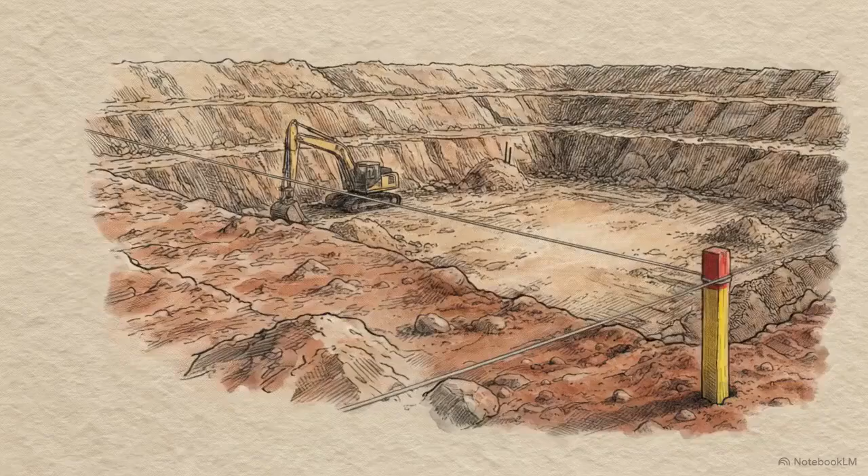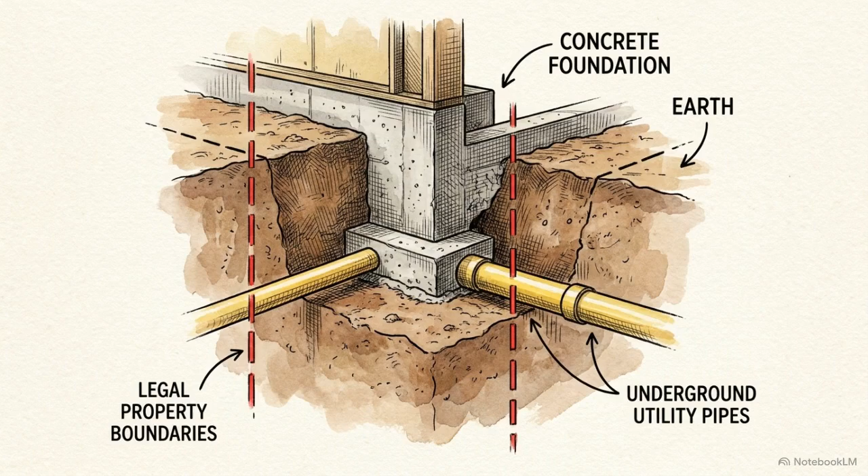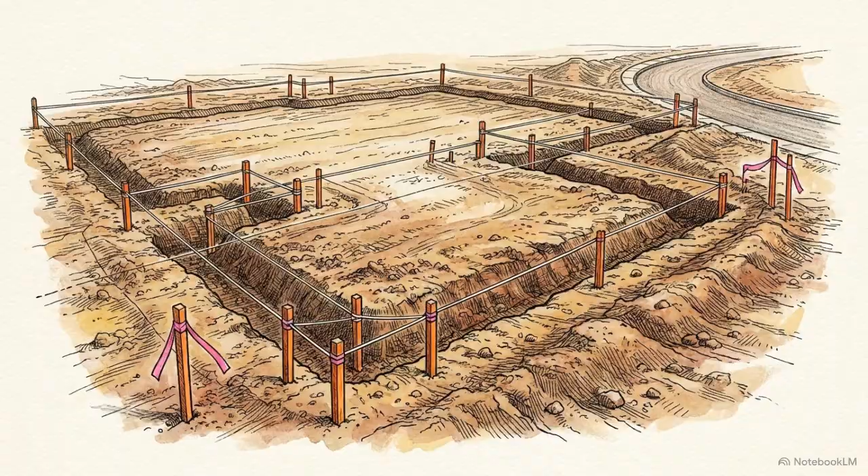Concrete is expensive, but pouring it in the wrong place costs even more. If a site measurement is off by even a few millimeters, a project risks crossing legal property lines or striking underground servitudes. Before any physical building occurs, a surveyor must translate the architectural design into coordinates and elevations. They establish the physical limits that dictate where every foundation and road will actually sit.

The land surveying branch is tied directly to property rights. These professionals are responsible for framing cadastral diagrams, the official state records of land, and establishing legal boundaries and subdivisions. Engineering surveying focuses on the mechanics of construction. Their scope includes setting out structural positions, measuring earthwork volumes, and ensuring the precise alignment of infrastructure.

Depending on your branch, you are required to log between 240 and 300 working days of approved training, split across specific categories of field and office work. This training isn't independent. Every hour must be completed under the direct supervision of a registered professional mentor.

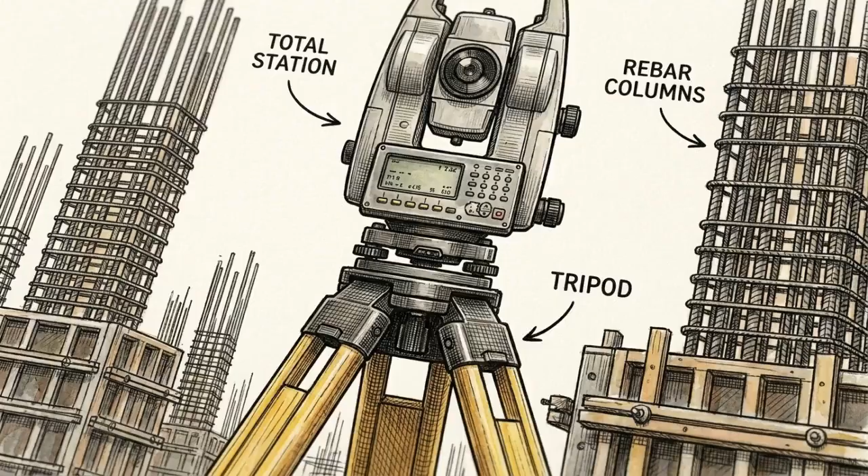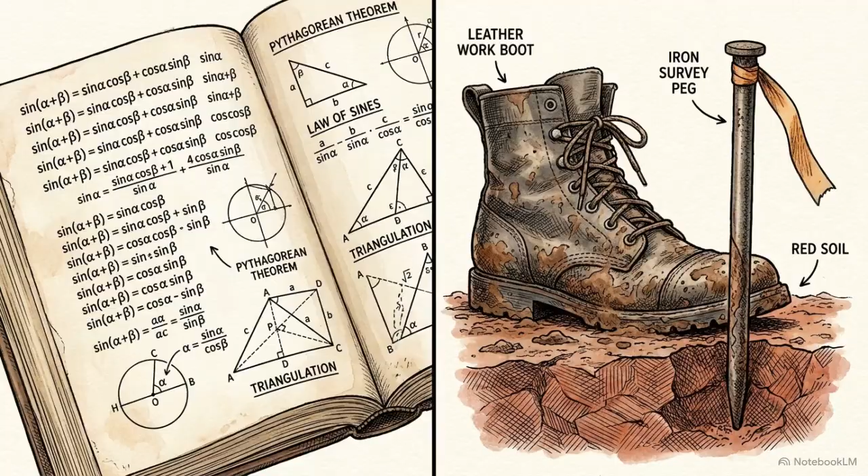For land surveyors, you'll need to prove competence in sectional title surveys, township establishment, and the physical execution of land subdivisions. Candidate engineering surveyors focus on different benchmarks. They must demonstrate they can manage high-order control networks and perform complex volume determinations on active construction sites. The training period exists to ensure an applicant can take academic theory and apply it to physical site measurements that are legally binding.

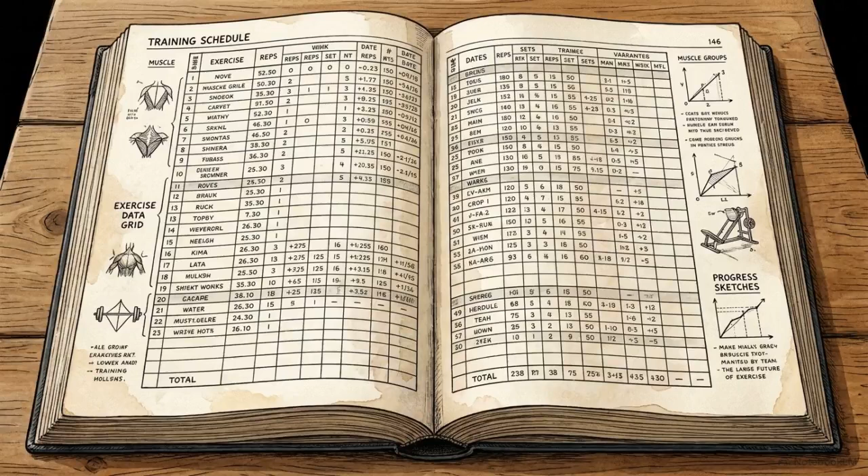Once the training days are complete, you submit your application pack. This includes certified identity documents, university degree certificates, and proof of payment. The most important document in this pack is the training schedule. As you can see in this logbook, you must provide a detailed record of your daily tasks, including the instruments used and the specific calculations you performed. Your mentor must sign off on these logs to verify that you carried the actual responsibilities of the survey, rather than just acting as an assistant.

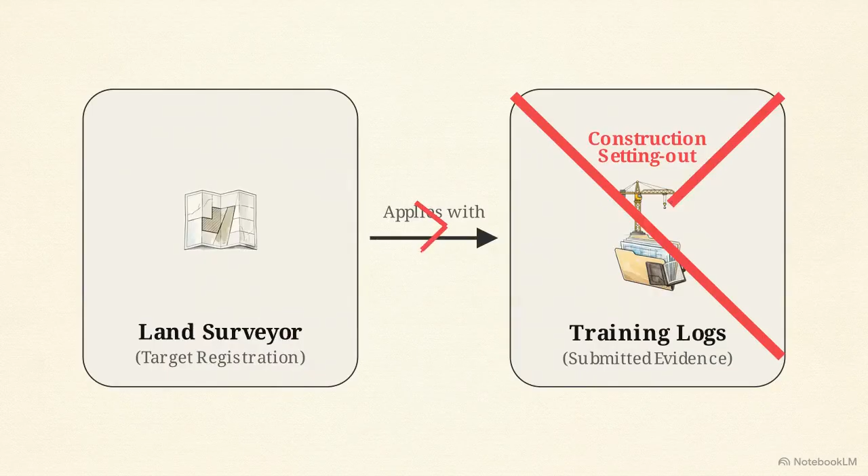A common mistake is submitting experience that doesn't match your chosen branch. If you apply as a land surveyor, but submit logs filled with construction setting out, your application will likely be rejected. Another pitfall is submitting logs that only describe equipment operation. The SAGC is looking for an analytical professional who understands applied error theory and can interpret engineering drawings independently. This documentary evidence allows the council to verify that an applicant is capable of assuming professional liability for their work.

If your documentation is approved, you enter the assessment phase. This includes a multi-day law examination covering the Geomatics Profession Act and provincial legislation relevant to land development. Professional land surveyors must also pass a practical reconstruction test. In this scenario, you are tasked by the Surveyor General to mathematically re-establish a missing property beacon using only known control points in the surrounding area.

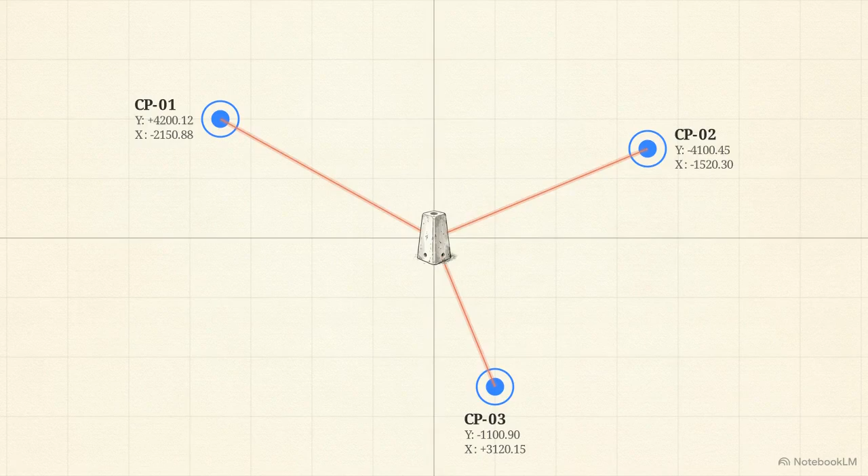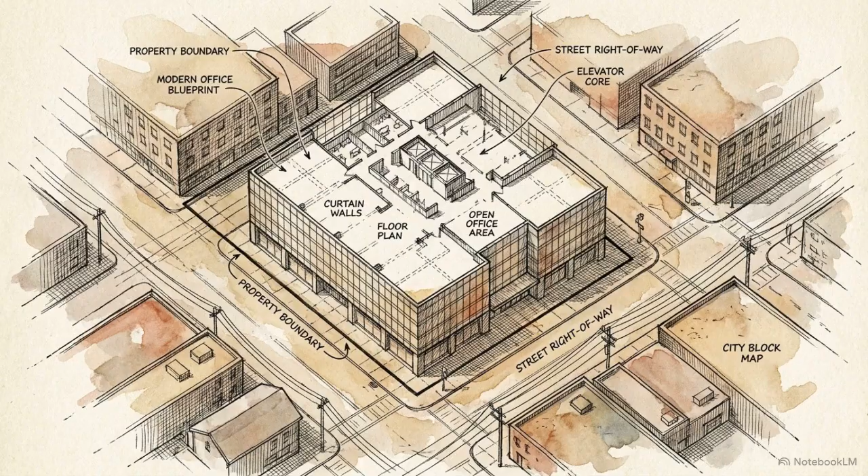To conclude the process, you must submit a fully referenced essay on professionalism and ethics, specifically focusing on the laws and organizations that govern the profession in South Africa. This rigor is necessary because a registered surveyor is the person who prevents boundary disputes and ensures that building positions match their legal diagrams. SAGC registration marks the transition from a candidate to a professional. It is the legal recognition that you are competent to take responsibility for your measurements, ensuring that the physical structures we build match the legal record.